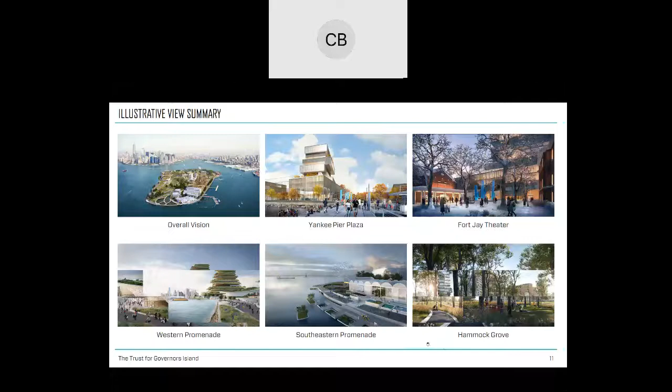This is not going to happen overnight. We are really at the beginning of this journey. Right now we're doing three things in parallel. Obviously we are here before you about the rezoning of the South Island that would enable this vision to come to life. But at the same time, we are working on public strategic planning and public engagement. We'll talk more about that at the very end of the presentation, but really trying to engage folks in what that RFP says and what we're looking for from future users. And then third, outreach and marketing to prospective respondents to ensure that this is a successful proposition.

That will play out, as I said, over the course of the next 7 months, gearing up to a solicitation sometime next calendar year. A brief reminder that we've talked a lot about this in this group.

There's a number of different controls in place for the island. At the top of that sort of pyramid is the deed. When the federal government sold the island to GIPEC, which was jointly controlled by the city and state, the deed provided controls about certain prohibited and permitted uses. And those, no matter what happens with the zoning or the RFP, are in place for certain periods of time.

The zoning, which is what we're here to talk about today, really creates the envelope. It expands upon the allowable uses and sets up restrictions in terms of height, lot coverage, and where development can be located.

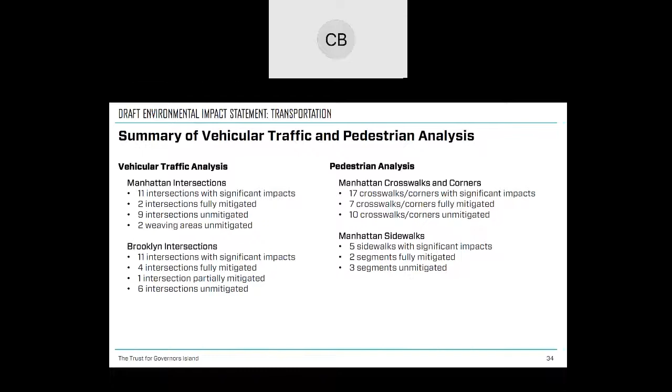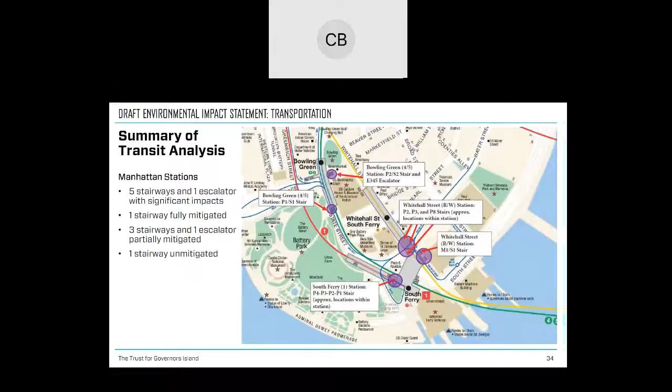Within the subway system, we identified 6 elements that would have a significant impact, 5 stairways and 1 escalator. One of these could be fully mitigated, one of the stairways, and that's really done through reconfiguring the stairway to provide more width for pedestrians going up and down. 3 of the stairways and 1 escalator were partially mitigated, again through reconfiguring, or in the case of the escalator, potentially speeding it up. And 1 stairway was unmitigated, attributed to physical constraints of the subway. All of these have been developed in coordination with New York City Transit.

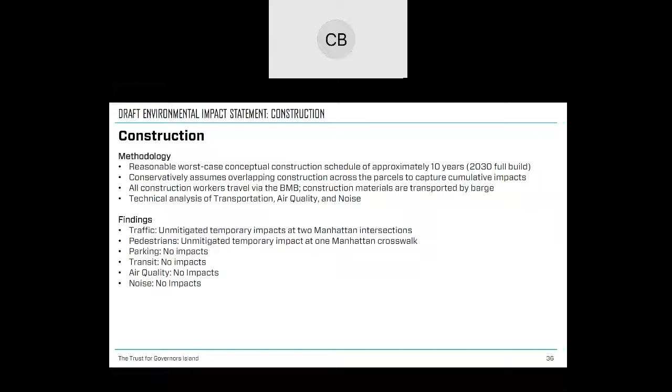In terms of construction, touching back on what Wesley said, we looked at a 10-year build out. When you look at a 10-year build out, you squeeze the construction envelope so that all these sites are kind of being built on at once. So you have this worst case scenario of the amount of traffic coming to the ferry terminals to get to the island. The assumption was, at least for traffic, all construction workers would funnel through the BMB. When we looked at that, there were 2 intersections that were impacted but we could not mitigate. Again, these are temporary impacts, as once construction is done, the impact goes away. Similarly with pedestrians, there was one impact at a crosswalk. We did not notice any parking or transit impacts, or any air quality and noise impacts.

I think, Wesley, I'll turn it back over to you.

Thank you, Mike. So as part of the construction analysis in the DEIS, there was also a study undertaken of potential hazardous materials or air quality impacts. While the EIS did not find that there would be any potential impacts in these areas, the trust did commit to a number of measures that would minimize any potential effects from these sources. As landlord during development, the trust will be able to require that any designated developer implement these measures through its leases and other requirements on the ongoing redevelopment.

So with respect to hazardous materials, the trust has put out a remedial action plan and a construction health and safety plan, which would ensure that there's no potential hazmat impacts.

With respect to air quality, there are a number of measures the trust would be requiring to minimize any pollutants. That includes dust suppression measures, idling restrictions, and the use of ultra-low sulfur diesel fuel. Also, the use of best available technologies during construction would be required.

More generally, the trust is planning for a public engagement process that will continue during construction. They'll have assigned personnel to coordinate with contractors and maintain up-to-date information about development on the trust website. There'll be a process for the trust to receive comments from park users on how they're being affected by construction, if at all. And there'll be flaggers at key access points to ensure the safety of all park users during construction.

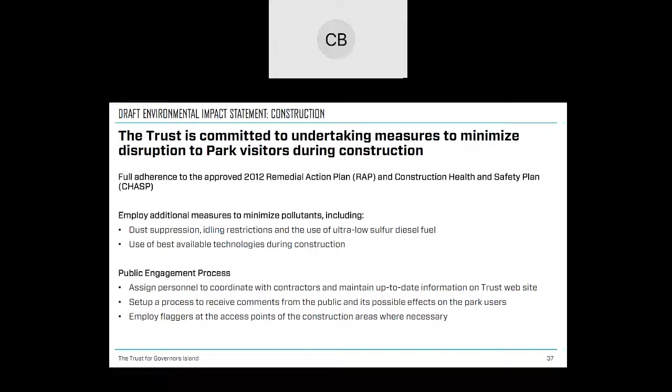Turning now to the shadow study. Although a specific design is not proposed, the shadow study was put together assuming development to the maximum heights permitted at each development parcel. Conservatively, it modeled development with approximately 850,000 square feet more than would be permitted under the rezoning. So essentially, the EIS looks at a building model that assumes almost 20% more development than you could actually have under the rezoning, giving a really conservative outer limit of what the shadows would look like.

The shadow model looks at certain representative dates, such as the summer and winter solstice and the spring and fall equinox. Based on the results, the lead agency, along with various involved agencies, reviewed whether the shadows would significantly impact park users or any plantings. Let's look at the results of the model.

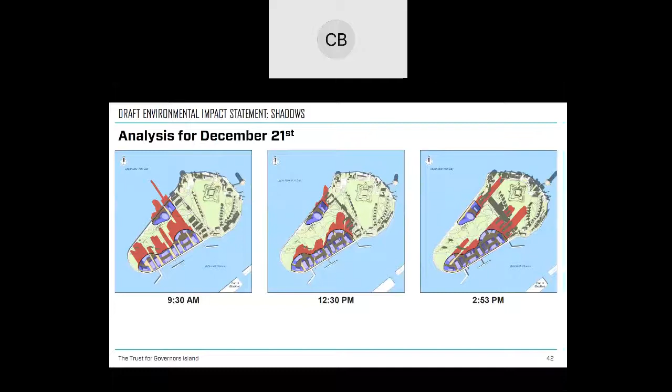As a summary, the EIS disclosed that the rezoning would only result in potentially significant impacts with respect to transportation and construction transportation.

As for next steps, the DEIS is publicly available for everyone to read and comment on. City planning will be having a hearing where public comments will be accepted, anticipated for February 2021, though it has not been scheduled yet. Thereafter, the public comment period will stay open for an additional 10 days for any written comments. After that, the final EIS will be published at least 10 days before the City Planning Commission vote, anticipated in March 2021.

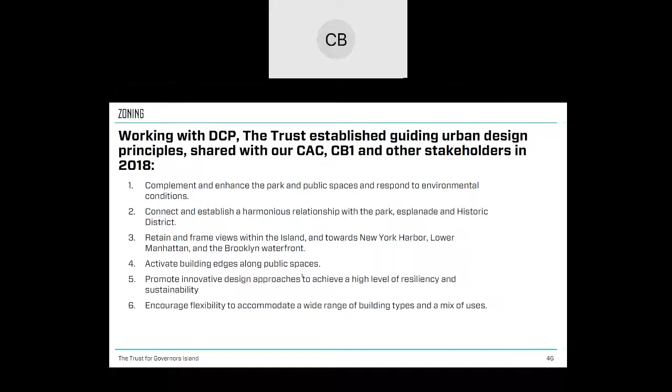We worked over the past couple of years to establish design guidelines to help frame what the rezoning proposal would look like. Since then, we've been working with FX Collaborative to come up with a proposed zoning envelope, and they've taken these design guidelines into all the considerations you're going to see today. They include creating connectivity between the water and the park, creating a harmonious relationship with the park, maintaining important view corridors, and making sure the development parcels complement and continue to enhance us as a public space.

So with that, I'm going to turn it over to Jack Robbins at FX Collaborative to walk us through the zoning framework. Jack? Thank you, Claire.

I know some of you have seen some of these before. Forgive the repetition, but I think this will be helpful for anyone who has not seen it. So just a little quick history. This is what the island started out as, not at all the shape we know it today, when it was a hunting ground for the Lenape Indians.

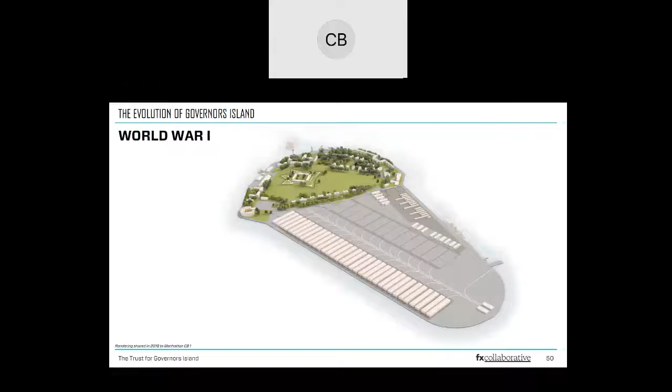It first became a military outpost in the Revolutionary War, and it would remain a military outpost for the next 200-plus years, taking a lot of different shapes over that time. Most notably, the South Island was created with fill from some of the first subway lines dug in New York, brought out here, and during World War I it took on a very industrial character.

When it came under the Coast Guard, the South Island was built out in a very different way, with integration of buildings and open space, and some addition of playing fields. The buildings, I will say, were maybe not of as quality and character as those on the North Island.

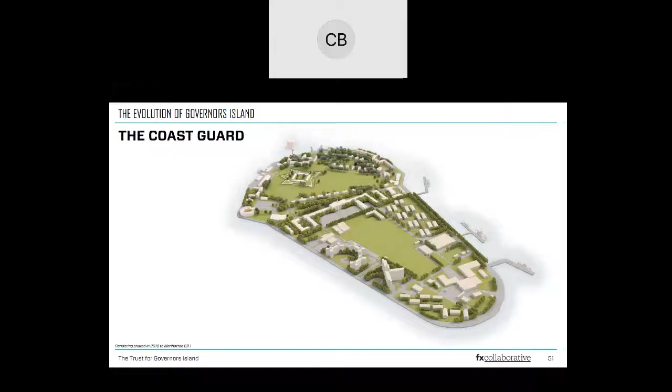And then came the master plan and the creation of the park and the development zones, really creating an incredible destination for New Yorkers and for those from far beyond New York to come to Governor's Island.

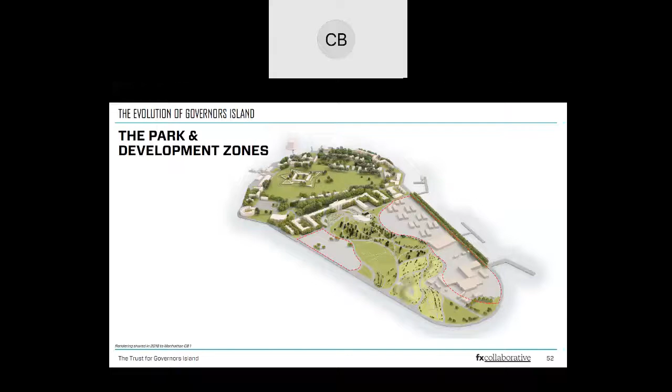And then this fantastic master plan that West 8 did, with this incredible park and these two development zones on either side. From the very beginning, this vision for the South Island was about integrating park and open space with the development zones, presenting this incredible, once-in-a-lifetime opportunity to set a new standard for sustainability and for integrating green space and buildings.

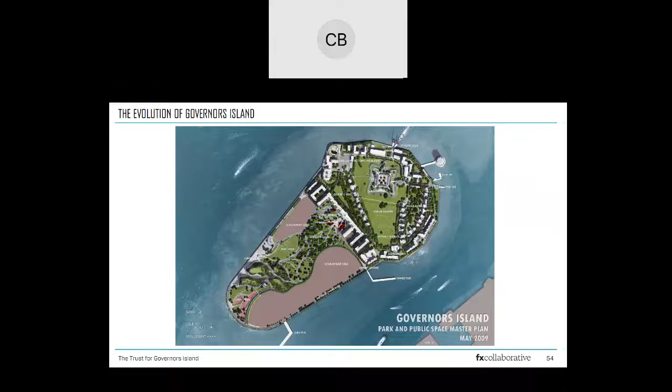Those development zones today are largely fenced off. Some of those buildings we saw in that aerial photograph are still there, have not yet been demolished, but will be. The zones that will become the development zones are not part of the park today. They're not things people are experiencing, places that very few people have actually been, at least in recent years.

So I'm going to walk through some of these urban design principles and what they mean, and then we'll get into how those actually shape the zoning.

One of the absolute key principles was to connect the two major assets of the island: this incredible park and the waterfront, with the incredible views and experience of New York Harbor that waterfront gives you. One of the key ideas was to have those two zones weave through the development zones and bleed into each other, so that it's one continuous experience.

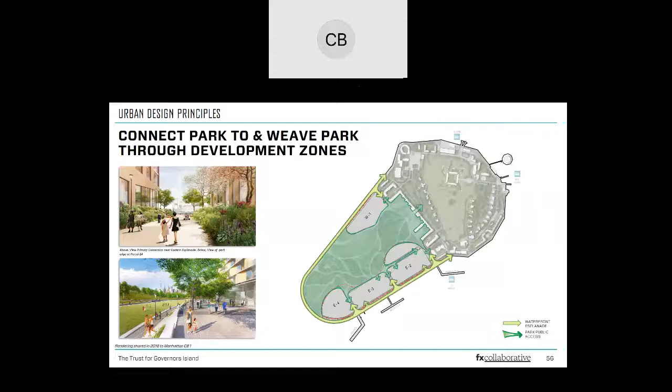One of the models we look to for that kind of integration of open space and development is something I'm sure these community boards are familiar with: Battery Park City. We'll have significantly more open space, not just in numbers but in percentage, than Battery Park City, but I think it provides a good model for how green spaces can coexist and weave through development areas. And I think we can do even better than this, really push that envelope.

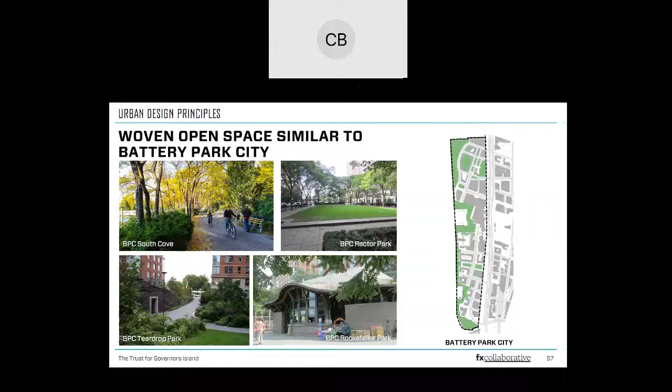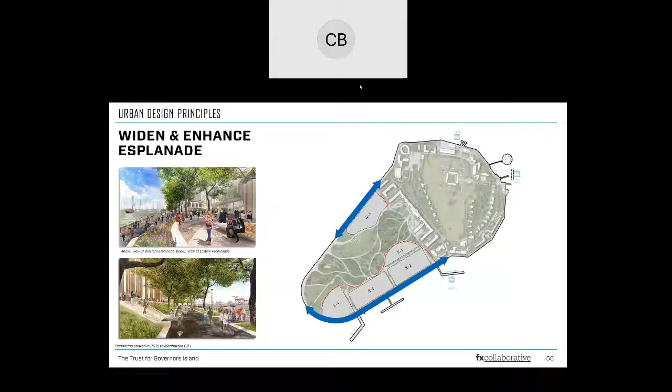Another key element was to enhance one of the great assets that the island has in this waterfront esplanade. So we have widened the esplanades on both sides of the island, both to create generous public spaces, and also to allow space for dealing with resiliency issues. Buildings, or maybe even grade level, are going to need to be elevated to deal with flood elevations, and we want to make for smooth transitions within that zone, not create walls along the waterfront, but allow those to be nice, gentle transitions.

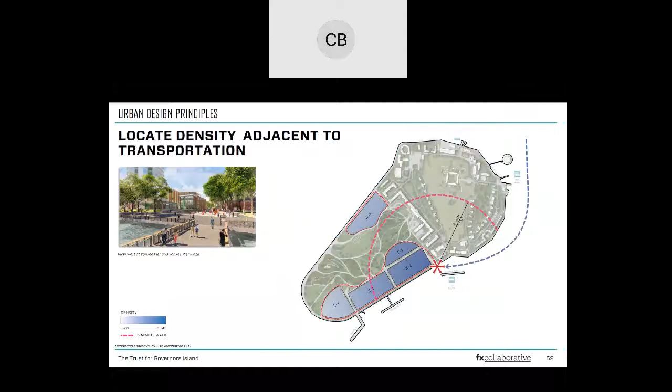Yankee Pier is going to be the gateway for this area of the South Island, and it serves a lot of the North Island as well. It's really the most viable entry point, and as just basic good urban design principle, transit-oriented development, we put the higher density close to the transportation. It's easy to forget sometimes how big this island is, and that it can actually take quite a while to walk from one side to the other. So to help encourage people to come here, we want to make sure that the development is easily accessible from the transportation and vice versa.

And then we want to be very sensitive to the transition between the North Island and the South Island. There used to be Division Road. It's still there in a legal sense, although it's no longer this sharp straight line that cuts off the South Island from the North Island. The West 8 Master Plan introduced these curving paths, brought them into the courtyards of Liggett Hall, and we have built upon this series of courtyard spaces in this zone that divides the North Island and South Island, as that integration between building and open space.

So we've created Yankee Pier Plaza. There's also a set of special controls along this transition between the North Island and South Island for any development on the South Island. It helps to make a nice transition in terms of height and really sensitive to the context to the north.

You can see in the rendering on the left, King Road, which is right here—I don't know if you can see my pointer—connects one of the roads that will connect the North Island to the South Island, and it's really an extension of the fabric of the North Island.

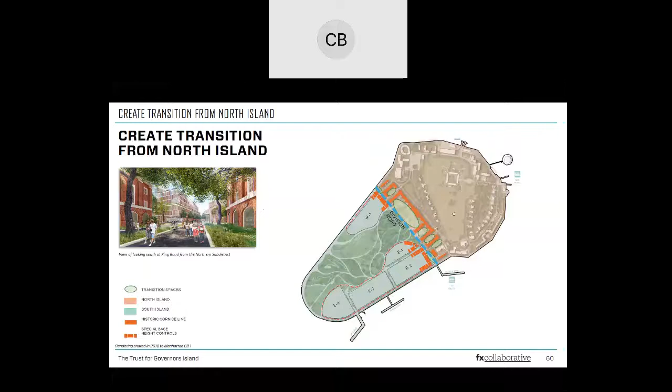And then a whole series of different kinds of nodes and paths. So some of those nodes are fairly obvious in terms of the arrival point at Yankee Pier Plaza; the oval, because of its special perfect geometry in the midst of all of these other waving curves of the park, really creates this special place. We want to be sure and connect both of those places to other areas in the North Island and to each other, or even places where there's a kind of coming together of different paths. So if you look along the edge of the west parcel where a bunch of different paths come together, that also creates a node. We want to be sure to acknowledge that in the design.

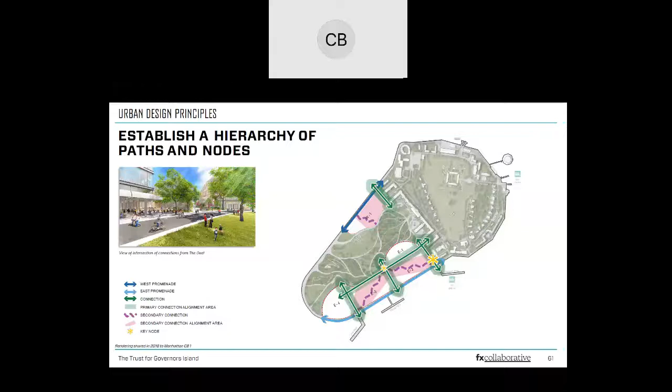So we've created a flexible envelope, and it is just an envelope. We have not designed buildings. We have tested these zoning regulations with lots of different building forms and configurations. We feel that we have created a set of zoning controls that will enable development and enable a kind of flexibility, but at the same time really preserve all of those fantastic, unique qualities that Governors Island has today.

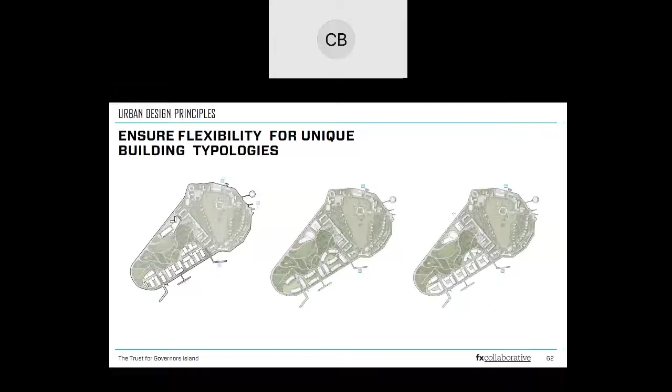Next. So I'm going to turn it over to Ben Abelman.

Thanks, Jack. So I'm here to walk through and translate how the zoning framework and the concepts embedded in it translated to the actual text.

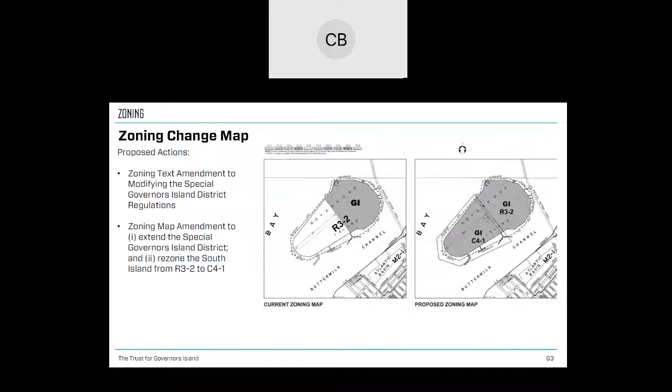So the first item to discuss is the land use actions that we are applying for this rezoning, and those are two. The first being a zoning map change, which is intended to draw the Governors Island special district to not only cover the North Island, but for it to cover the entire island. And then it will change the Southern Island zoning from an R3-2 single family residential zoning district to a C4-1 district, which is a medium density mixed use district. It's important to note that the North Island zoning is unchanged in the zoning proposal.

Next. So once we've established the new zoning overlay of the new zoning districts, we are subdividing the island into two different sub-districts, and then on the southern side, dividing that sub-district into three sub-areas. The three sub-areas of the southern sub-district consist of the eastern development sub-area and the western development sub-area, and these are the only locations where new development can exist. And then the open space area is established to ensure that the open space and park that is there today remains publicly accessible and open as open space. Next.

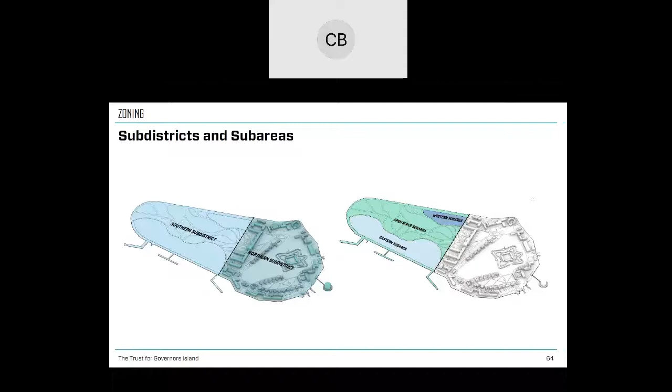Next, please. So now I'm going to walk through the series of ground plane controls. So the slide you see...

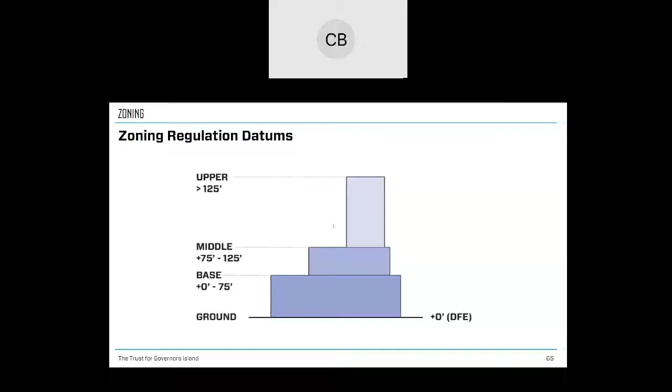So the ground plane controls are established to create the development parcels within the development zones. On the eastern development sub-area, there will be 4 development parcels, whereas the western sub-area will be 1 development parcel. Those parcels are created by additional open space, which are primary connections. The intention of the primary connections is not to be mapped specifically as shown in the green arrows, but to allow those green arrows to be anywhere within that green hatched area. That provides flexibility to tailor the parcels to the program within the RFP.

In addition to the primary connections, there is a requirement for public open space, which in the zoning will be called Yankee Pier Plaza, a minimum 25,000 square foot gateway at the foot of Yankee Pier, acting as an entry to the island. It's also important to note that the esplanades are widened from their current conditions, 55 feet on the east, widened to 75 feet on the west.

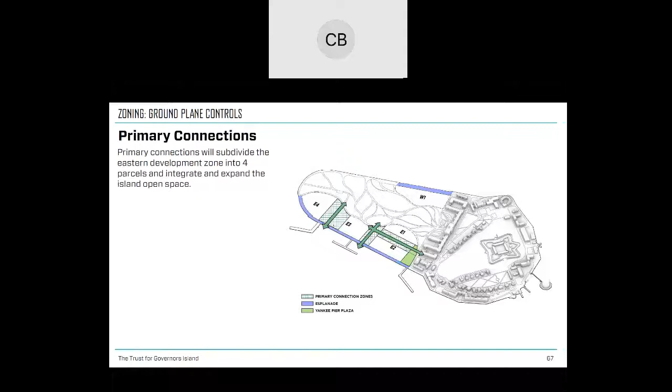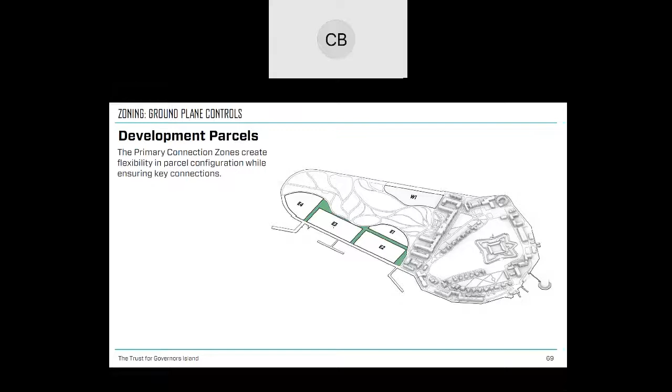As you can see on this slide and the following slide, these are just 2 examples of the flexible framework or flexible zoning tools in how these parcels can be crafted. Within that green hatched area, we could have curved, swaying lines mimicking the geometries found in the park, or, in the next slide, a more rectilinear parcel organization. I'm going to use this rectilinear parcel organization as the base case to walk you through the rules.

In addition to the primary connections, Yankee Pier Plaza, and the widened esplanades, there will be open space within the development parcels themselves. That's shown here with the green hatch again, with the green arrows. These are flexible zones where secondary connections can be located or required to be located within the parcels indicated. These secondary connections could be open to the sky, but they can also be enclosed, passing through buildings.

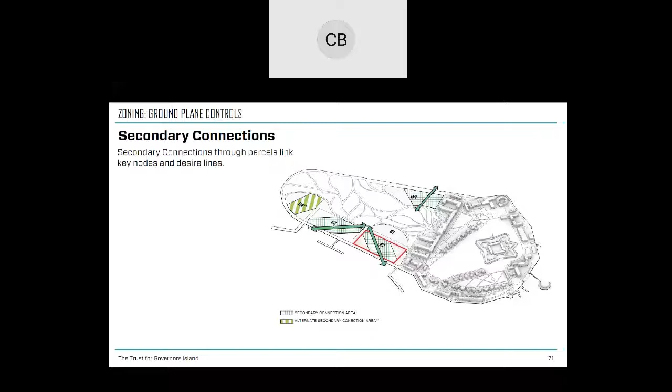Next, we're going to zoom into parcel E2 and take a look at how all of this is coming together. In addition to the secondary connections, the primary open space, primary connections, and Yankee Pier Plaza, there are other regulations that will create more public open space. One of those rules is a regulation that requires any building portion that is set back from a parcel boundary—that space between a public access area, the esplanade, primary connections, or the park, Yankee Pier Plaza as well—must become open space.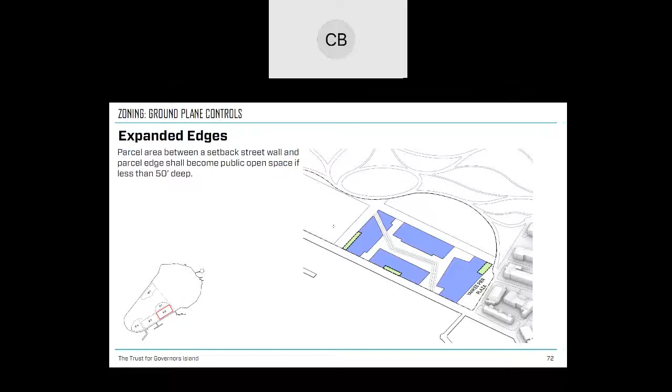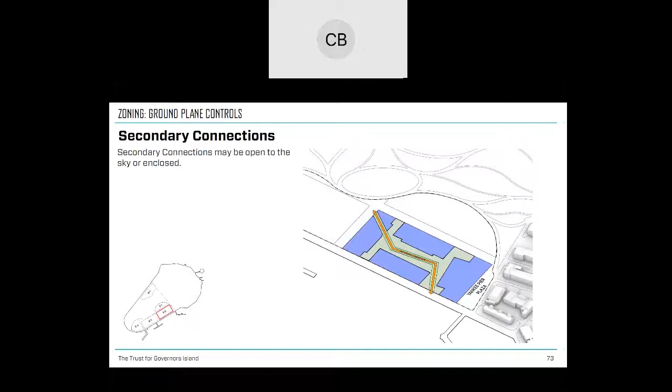These areas highlighted with neon green are building footprints which are set back from that parcel edge, and that neon green would then have to become part of the public open space of the development zone. Next, here we're seeing the secondary connection taking its diagonal path around the building footprints within this illustrative footprint on parcel E2, where it would enter from the esplanade and exit towards the oval. We're showing the secondary connection passing through a building at that northwest corner.

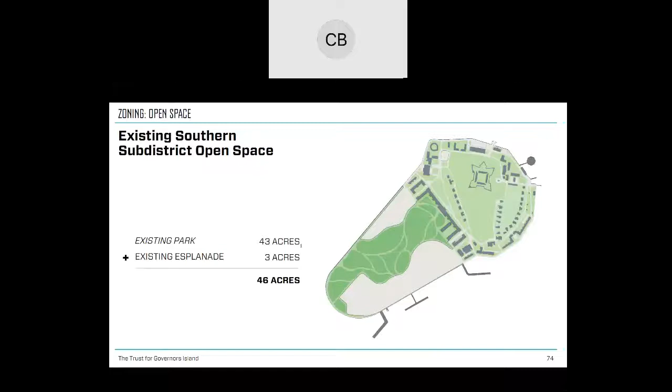So it's important to tally up all of these additions of open space. Right now, the park is 43 acres. If we add on the existing esplanades, it gets us up to 46 acres. Next slide.

With all of these additions to the expanded park, certain areas adjacent to Picnic Point, currently fenced off, will be turned over to the park and added into the open space. The widened esplanades will add over an acre, Yankee Pier Plaza will be just over half an acre, and the primary connections themselves will account for approximately 4 acres. So within the development zones, there'll be about just over 8.5 acres of additional public open space.

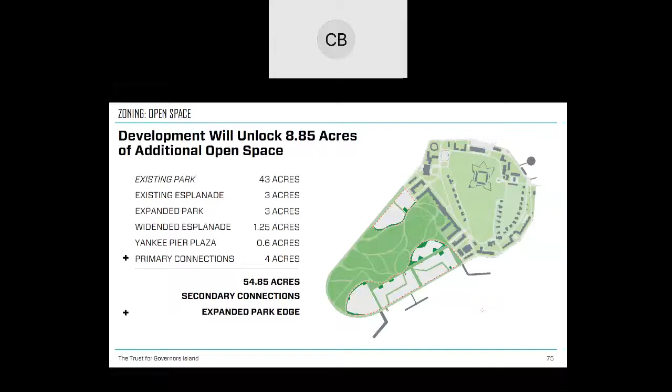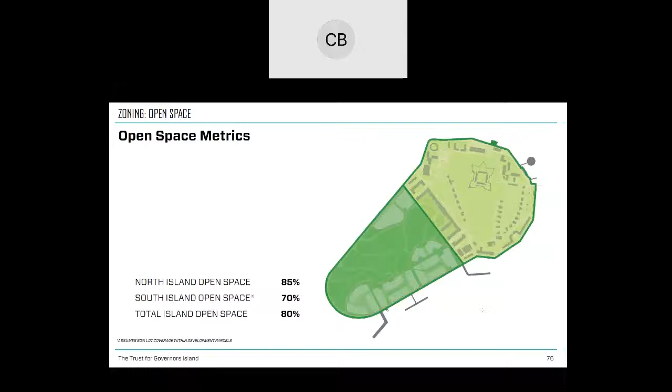Looking at the percentages of open space on the North Island—the total lot area subtracted by the building footprints—about 85% of the North Island is publicly accessible open space. Within the South Island, we'd have 70% open space, assuming the most aggressive amount of lot coverage, so it could be closer to 85%. In total, the island will be 80% open space and 20% building.

Now let's go above the ground plane and talk about the bulk regulations, which are divided into three datums: base, middle, and upper. The base portion of the building is predominantly established between the design flood elevation and 75 feet above it. There are a couple of exceptions to the maximum base heights: for buildings fronting solely onto the esplanades, the maximum base height is 60 feet, and adjacent to transportation at Yankee Pier Plaza, we're permitting a higher base height of 90 feet. In addition to height controls, building size is controlled by lot coverage, permitting up to 80% lot coverage to allow large, low floor plate buildings.

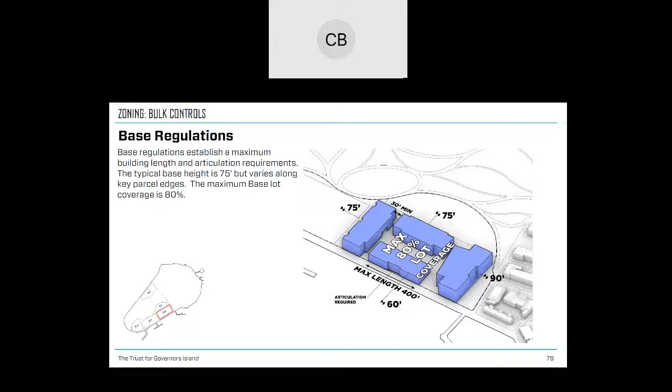We're establishing a regulation that limits building length to no more than 400 feet, to ensure porosity through the development parcels. In addition to the maximum building length, there are articulation requirements so we don't have a long blank street wall, and we require a minimum 30-foot distance between buildings, again to ensure porosity.

The mid regulations apply between 75 and 125 feet. The lot coverage turns down here, going from 80% at the base to 50% at the middle, while the minimum distance turns up. So as we move up, the footprints get smaller and the space between buildings gets larger—it's a 60-foot minimum distance at the middle section.

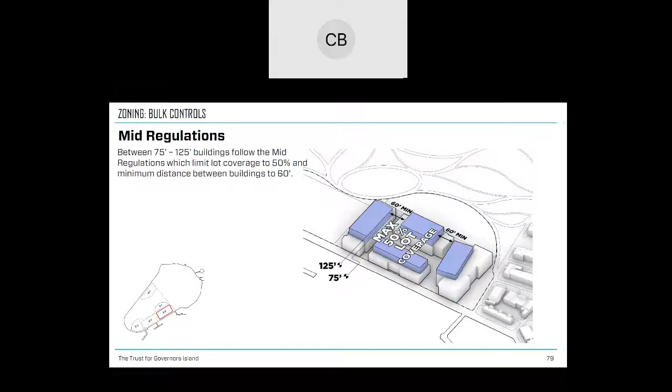The upper building portions are controlled by lot coverage, which is 30%, further reducing the size of building footprints above the middle section. In addition, each individual upper portion floor plate cannot exceed 30,000 square feet, so we can only have 30,000 square foot increments above 125 feet. The minimum distance between buildings expands to 90 feet, and there are maximum building height controls, which, as you'll see next, can be exceeded by permitted obstructions.

Maximum building heights vary by parcel. W1 and E2 both have a maximum building height of 300 feet. Parcel E1, just to the west of parcel E2, is 230 feet. The remainder, E3 and E4, have a maximum building height of 200 feet.

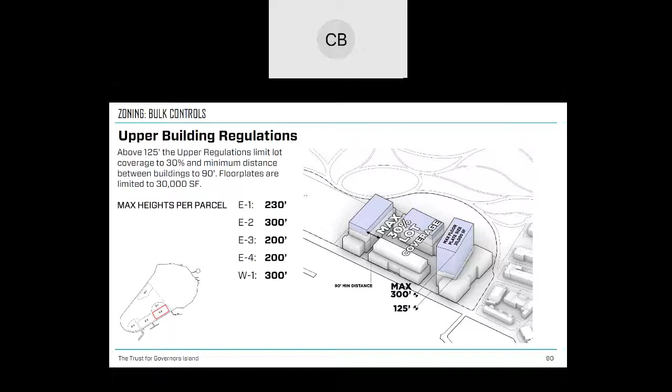In addition to the size and lot coverage of upper building portions, there are controls to ensure we're not creating a wall above the base parallel to the waterfront on the eastern development zone. We have rules promoting the narrow face of the building being closest to the water, but with optionality to allow a building running more north-south if it's pushed far away from the water.

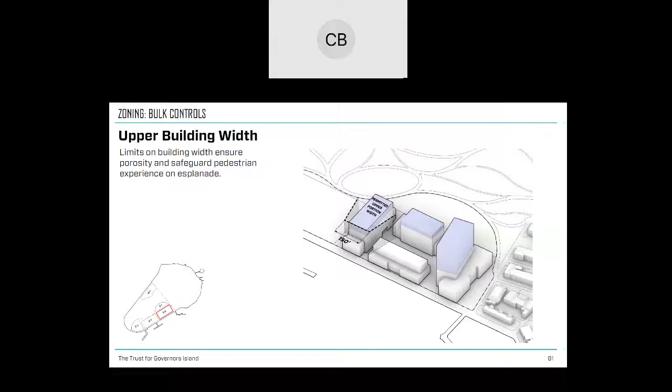Maximum building heights can be exceeded by permitted obstructions, typically elevator and stair overruns and mechanical bulkheads. Because of the location in the middle of the harbor, and for resiliency purposes, we believe an oversized allowance is needed, providing ample room on top of buildings for all important mechanical systems. So we can exceed the maximum building height by 40 feet with the size of the footprint below, and by an additional 20 feet, though that footprint must be no greater than 50% of the footprint below.

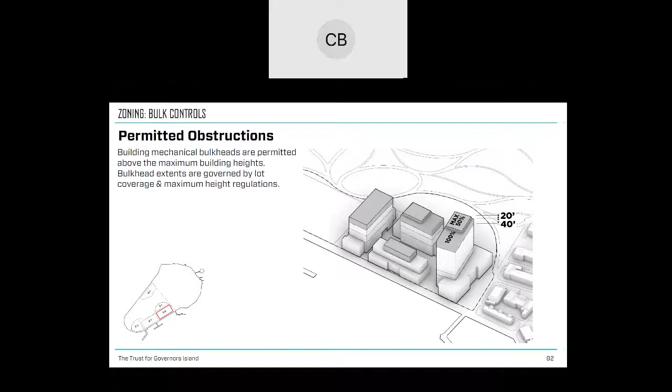So those are the controls that are consistent throughout both development sub-areas, but there are some special controls which I wanted to point out.

One of those is activating the ground floor, and one of the ways zoning typically does this is through transparency requirements. Adjacent to secondary connections where they pass into buildings, there will be transparency requirements to highlight and indicate the uses and invite people into these spaces. In addition, there are transparency requirements adjacent to Yankee Pier Plaza, which we see as that gateway to the island and to the new development.

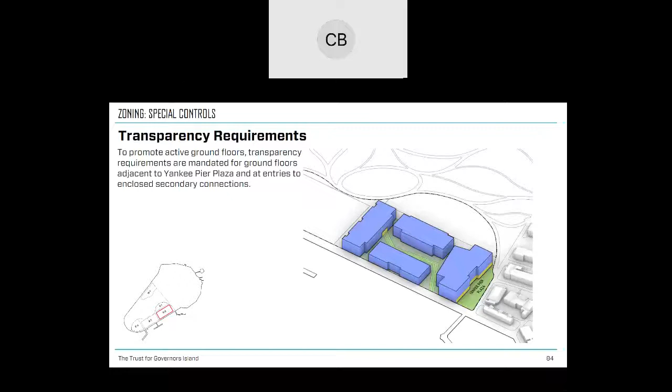In addition to the regulations about tower orientation within the upper zones, there is one very specific regulation which applies to the first building adjacent to Yankee Pier Plaza. If an upper portion is within that first 200 feet within Yankee Pier Plaza, it cannot be perpendicular to the waterfront.

The reason here is that Division Road, which we see as this straight line cutting across the island, is coming in at an acute angle from the waterfront. So we do not want to pinch the space at Yankee Pier Plaza, and we want to ensure an open corridor to permit light and air, and that entry point into the park.

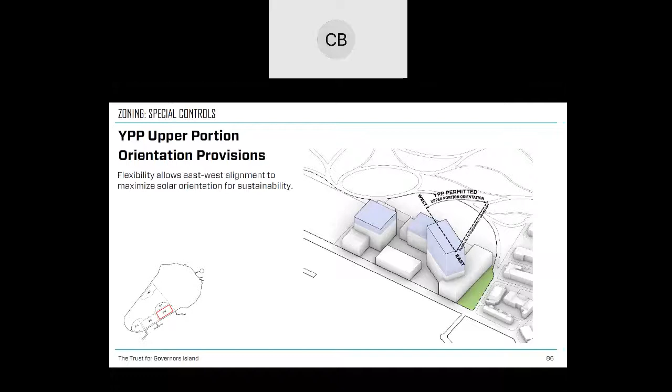So for this tower, we're not prescribing a specific orientation. It can be oriented anywhere from parallel to Division Road, or oriented to optimize solar gain and passive heating and cooling. We can orient the building true east-west.

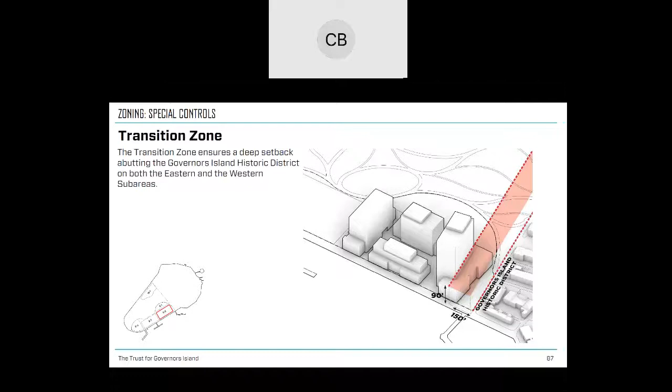Setbacks established from the primary connections and from the park are typically 15 feet. But there are a few special conditions where we have deeper setbacks, one of which is the transition zone, measured from the Division Road sub-district boundary line, offset to the south by 150 feet. That 150 feet from Division Road cannot have anything above a base. This ensures a deep setback not only in parcel E2, but in parcel E1 from the northern sub-district, and it also pushes any upper building portion on the western development parcel further south.

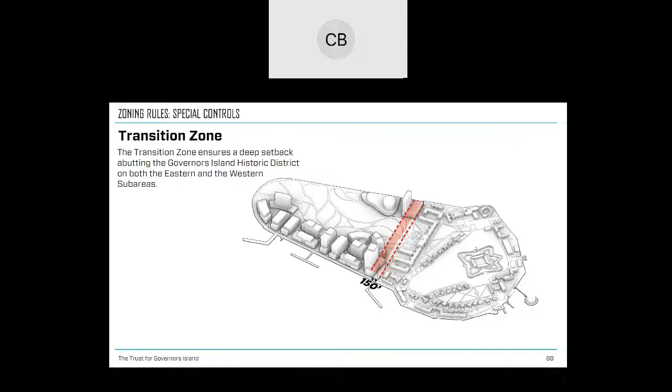Now looking at parcel W1, which is unique because it is the development sub area and a parcel all in itself, it will have the secondary connection requirement, which you see bifurcating the site in this massing. But there are specific base height regulations here.

The main base height regulation limits the maximum base height at the southern end of the Western Development Zone to 50 feet in that first 100 feet from the south. That's really to step down towards a future park amenity and the views out to Statue of Liberty, and also to step down towards Outlook Hill.

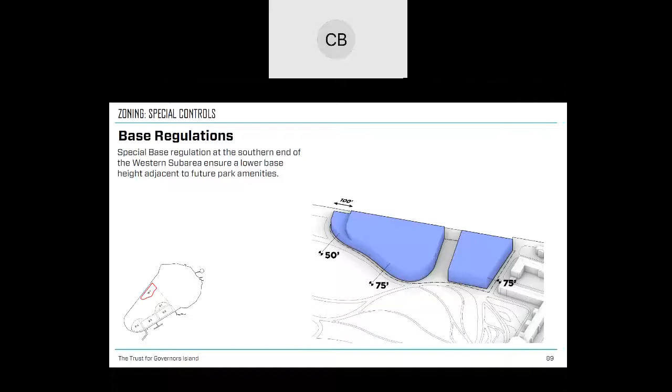In addition to the special base height controls on parcel W1, we have limitations as to where upper building portions can be located. The areas shown in gray and red are areas where we cannot have any upper building portion. This is the first 100 feet from the south of the Western Development Zone, and the first 100 feet from the Western Esplanade, so a setback of 100 feet would be the minimum. We also have the transition zone of 150 feet, which creates a more limited area where we can have upper building portions. This is crafted to ensure good views towards Lower Manhattan from Outlook Hill.

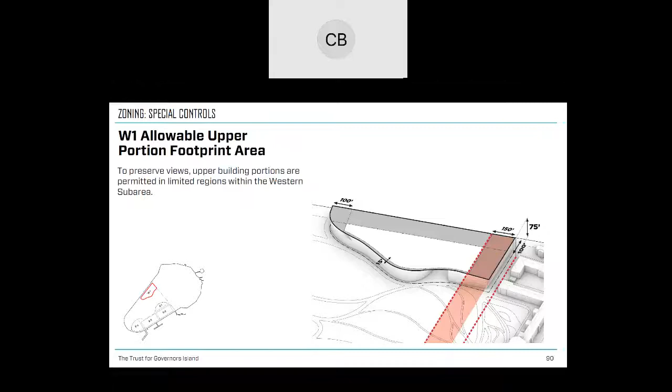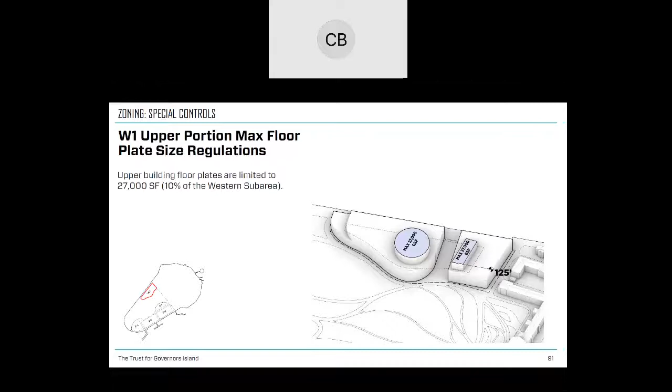In addition to the lot coverage regulations of 30% for the upper building portions, maximum floor plate sizes in the upper zone within the Western Development sub area is capped at 27,000 square feet, or 10% of the total area of the Western Development Zone.

Here we see the test case we've just walked through applied to all of the different parcels. You see, passing through the ghosted buildings, secondary connections, the woven open space, a variety of building heights adaptable to the eventual programs, and a network of new open space that connects visitors from the development zones to the park, and from the park to the development zones.

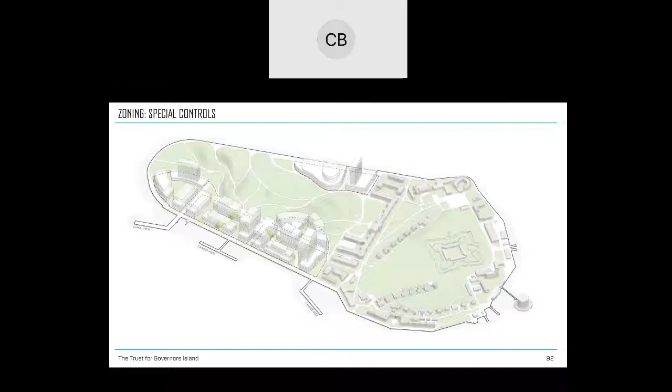So I'm going to turn it back over to Jack to discuss some view studies. We've had a number of questions from members of the community board and the public, and we want to address some of those questions directly. One of those questions has been about the views and what the impact on the views would be. I'll show you a series of view studies and renderings to try to answer that question.

There was a question about the view from Outlook Hill. This is showing the development on the Western Development Zone and the view from Outlook Hill. You can see the controls that Ben was just talking about, keeping the part closest to Outlook Hill low so it doesn't block views of the Manhattan skyline. We don't know exactly what the buildings will look like - they haven't been designed. These are just massing studies, but the tower you see there does represent the maximum height allowed in this development zone.

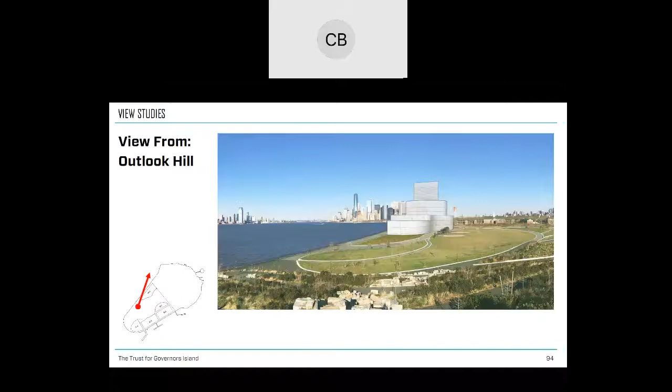Next, Liggett Terrace - as you come through that great arch and enter this wonderful realm of the park, what do you see, and what's that experience going to be like? This shows the Eastern Development Zone on the left and the Western Development Zone on the right. It's important with all of these views to keep in mind that this is an ever-changing environment - the trees will grow in, and the dashed line represents the full height of the tree canopy when it grows in. We've seen other renderings showing some of that, and so the development will be largely not visible because of the natural growth of the trees.

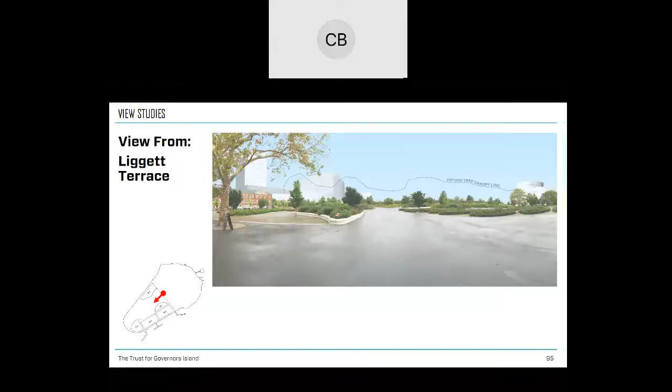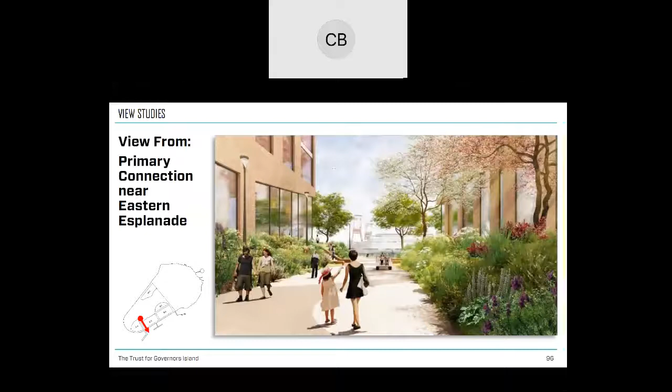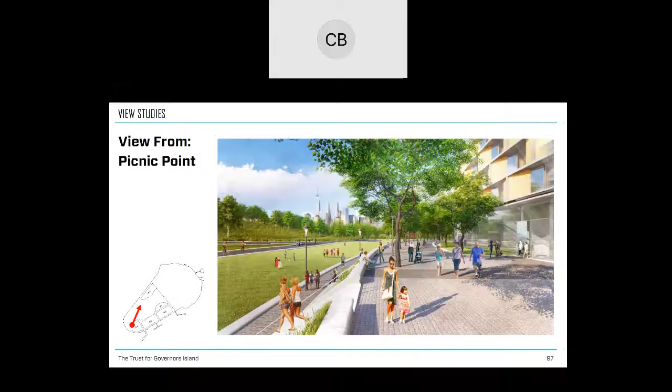Or all the way down at Picnic Point, when you look back towards the Manhattan skyline, you really won't see any of the development on the western side. The beginnings of the hills really obscure that. You'll be adjacent to the lowest scale development just on the right of the image here. But it gives you a sense of how we're trying to integrate the buildings and the open space. Really, it's a symbiotic relationship - the buildings will help activate the open space and help provide amenities as well.

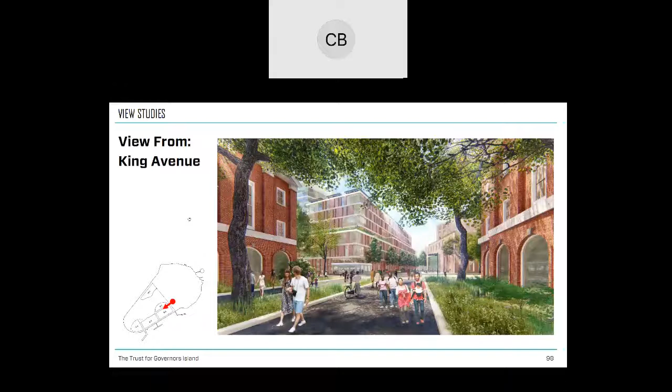Next. This is the same view I had pointed out earlier along King Avenue, looking over the North Island, the historic buildings you see immediately on the left and right, and the extension of King Avenue that becomes one of these primary connections heading towards the Oval, leading people through the development and into the park beyond.

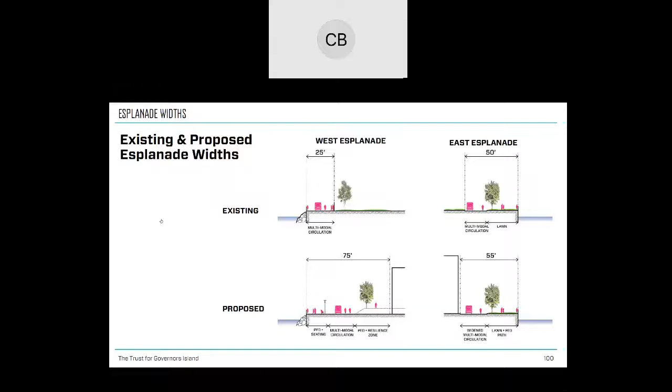Another question we got was about the esplanades and the expansion we've done with them and how we arrived at that number. So you see here on the top row the section, the profile of the existing esplanades on the west and east side of the island, and below that, what the proposal is. The western esplanade really gets tripled in size because it's too small now. As I mentioned before, it's very generous public space, also allows for potential grade transitions or other resiliency strategies. You can see in this section a suggestion of a set of steps and ramps that would go up to an upper esplanade. That's one approach to resiliency, but we're leaving it open because resiliency is a quickly changing area of design. And then on the East Esplanade, which is already fairly generous, just a slight expansion to that.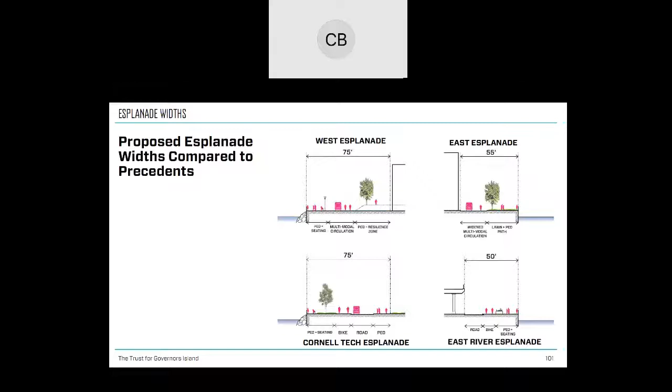Just some images for anyone not familiar with those, to refresh people's memories of what that spatial experience is like in those areas. East River Esplanade, like the Eastern Esplanade on Governor's Island, is a slightly more urban environment where there's more development next to it, like Cornell Tech on the western side. It's important - more isn't necessarily better. An esplanade can get too big and feel unwelcoming and kind of desolate. So a couple of examples, again, in both the more urban environment and a slightly less urban environment, of what that might feel like and what we're trying to avoid in sizing this. It is a bit of an art form and not an exact science, but based on these precedents, we think we're at the right number.

A similar kind of question about Yankee Pier Plaza and what that space is like. Next.

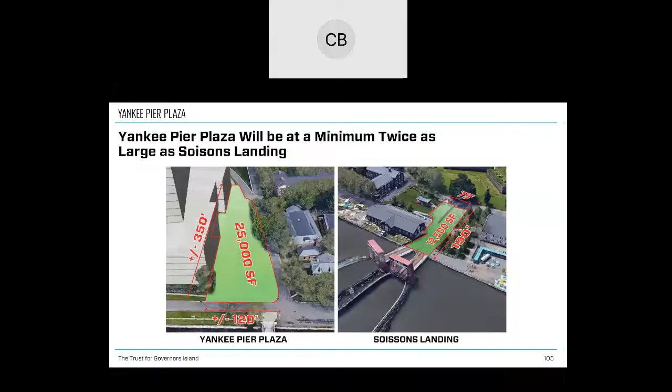Just as a comparison, Yankee Pier Plaza will be twice the size that Soissons Landing is today. We also envision that as a landscape space, a space you'd actually want to hang out in, that can act as a gateway, as well as a place where lots of ferry riders will transition, arriving to and from the island.

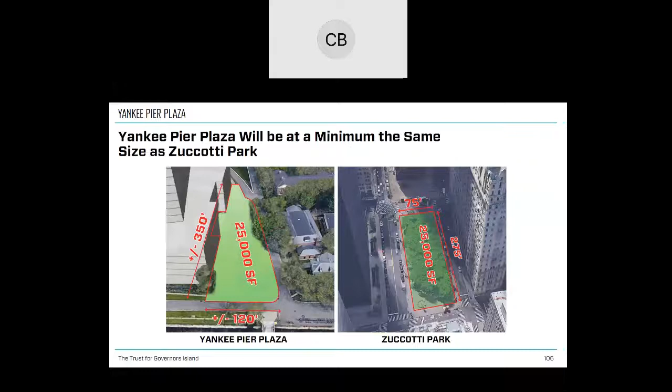To give CB1 a reference point you'll be familiar with, the area we've set aside for Yankee Pier Plaza is pretty much the same area as Zuccotti Park, providing a wonderful gathering space, a bit of green space in Lower Manhattan. So the overall area is very similar to Zuccotti Park.

So here on screen, I don't know, Claire, if you want to take this, a series of some of the other questions that we've heard.

Yes, thanks, Jack. A few other questions have come up in the past couple of sessions that we wanted to make sure to address so you wouldn't have to ask them again. Will development take park away? No. The rezoning creates that open space sub area, and expands the amount of open space, but none of the open space that is there today would be impacted or taken away.

Some folks have asked whether there could be a casino when the deed restrictions expire. No, casinos are not allowed under the proposed rezoning, in addition to not being allowed under the deed.

Somebody asked about infill development. This has come up a lot for this board in light of some of the conversation around East River. Infill is not being proposed. It would also require its own whole slew of approvals, including another ULURP.

How many buildings at the maximum height could be built? The way the zoning works, which Ben walked through today, is that each parcel has a bunch of rules for the area above 125 feet, which include lot coverage and capping of floor plate sizes, and finally minimum distance between buildings.

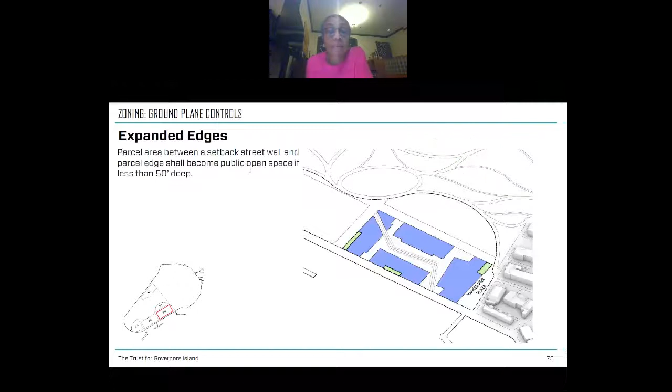And again, thank you for listening to this. We wanted to make sure to answer all the questions, put all the information forward so the community board and the public have full transparency and are able to comment and ask questions through the course of the evening.

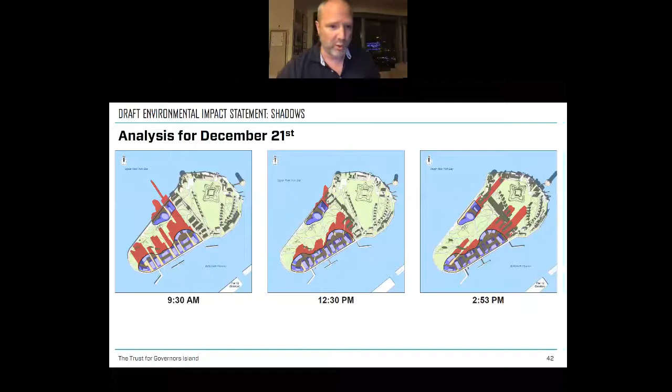Thanks, Fern. Just a couple of questions and a comment, and then I'll shut up after that. But thanks again for being here, this has been really informative. My first question, this might relate to something I asked a couple of months back about residential buildings. You're saying now the whole island was a concern for residential, but I don't remember that being the concern. I remember the concern being any residential development on the island, as opposed to—and I'm quoting you—hotel and dormitories only. Maybe I missed a meeting, but where did the change come from, from no residential to only some residential? My second question is, are you counting walkways, pathways, and roads as open space as opposed to green space, which is a concern of mine?

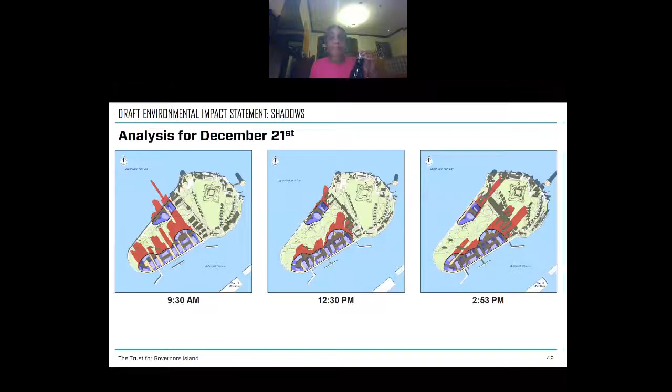And my comment, I'll leave you to answer all these: as someone who's been dedicated to climate change and renewables for 15 years now, I feel like the development of this island would far offset any efforts you have for a climate institute or classrooms for climate. The resiliency alone would cause tremendous problems for the island. And construction—the gasoline, the fuel used—all of it contributes greatly to the climate crisis. So I'm very curious how you'd offset that.

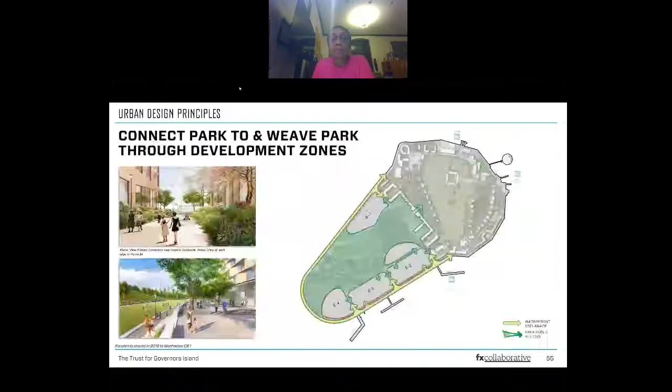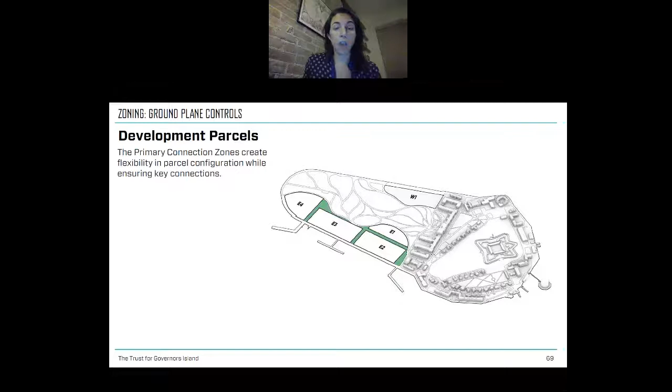Sure, Colin, I'm going to try to respond to the residential question, but please jump in if I don't get it right. Nothing has changed about what we were talking about previously. It remains the case that no permanent residential is allowed anywhere on the island. However, there was concern about whether there was a loophole because of the 3 FAR, up to 0.5 of it could be residential zoning. That would allow for things like faculty housing, but it would not allow for condos or standard leased apartments or something like this. So we just wanted to make sure tonight to answer the question that came up. I don't remember how many meetings ago, but folks were like, oh gosh, when the deed restriction burns off in 2062—

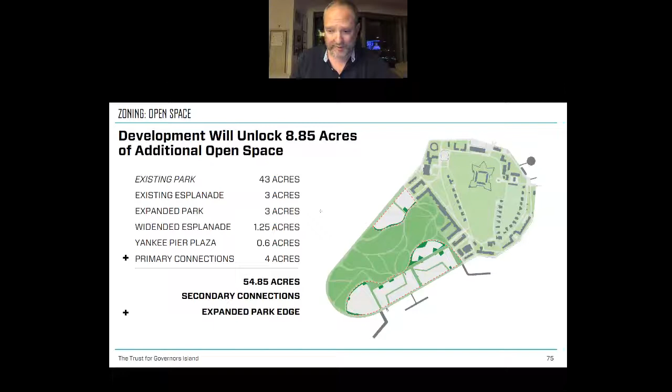It does. It seems a bit contradictory to the presentation we just saw, but I'm happy to take that answer for now, though I'll certainly be dogged on it in the future. Would love to hear the answer to the second question about how you're actually defining open space versus green space. Yeah, was getting to that, just wanted to make sure I checked the box on number 1. On number 2, yes, paths are counted as open space. We count them that way for the North Island as well as the South Island, just like the Esplanade itself. It may have some portions that are grassy and some that are permeable pavers or paved, but we count that as open space as well. We're not calling it park, obviously, but non-building footprinted areas.

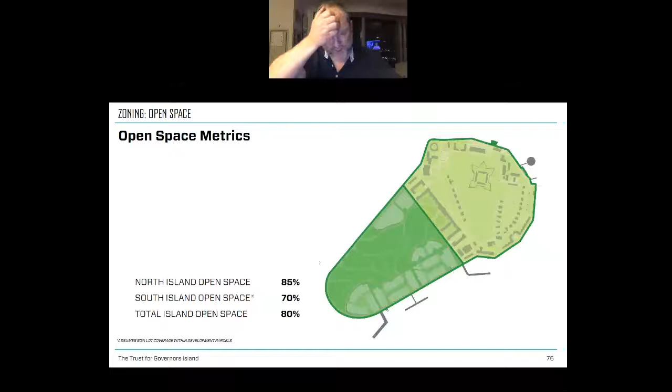Yep. And finally, I'm sure someone smarter than I am, maybe at Columbia's Earth Institute, could do some sort of study on the economic and climate impact of this project. How on earth are you going to offset it? I saw someone ask questions about solar and wind power. First of all, there is no wind regime on the island to even support a public bathroom, never mind a set of buildings. Second, this is what I do—if you were to power the island with solar, you'd have to cover the island in solar panels. So obviously you're going to need to draw power from somewhere. How are you going to offset not just that, but also the climate impact of the actual construction, which I'm assuming would take years?

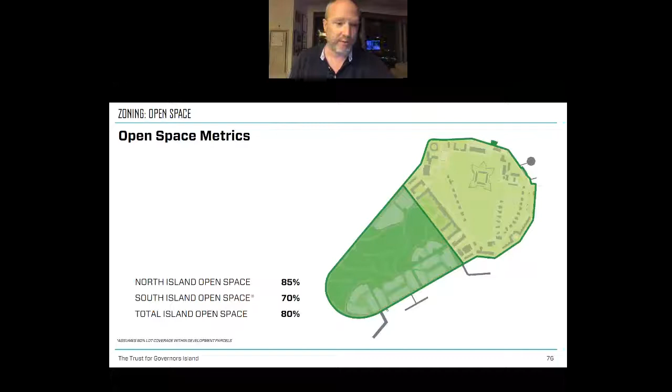That is part of the process that we're working on through those design guidelines for the RFP. It's something we're working on at the Trust for now. You're absolutely right about the wind power.

There's a slide in the appendix which we could pull up if helpful, but it's about both generating as much sustainable, renewable power as possible for the development, and also about bringing down the energy consumption of those buildings. We have some proposals around that as well. But I think the real thrust of what we're going to have to do is through the RFP process, describe to potential partners exactly what we're expecting in terms of performance criteria, because we're not going to be the ones designing the buildings, but they can respond to that in terms of their proposed development plan.

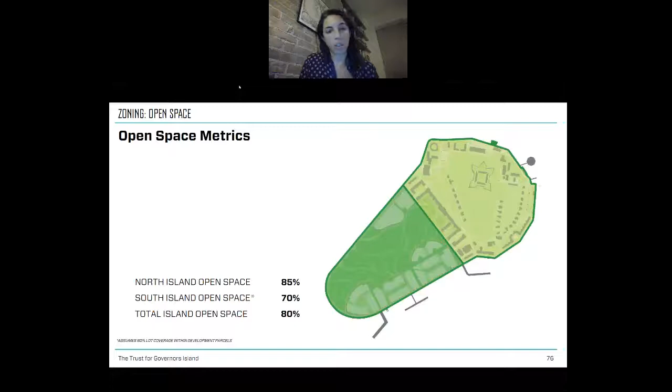It may be possible also to harness some geothermal power or other things, but I agree that wind's not going to get it done. One thought, and I'll let you go, but peaker power is a big thing, as is utility scale storage. I would urge you to look into that as well.

I have lots more questions, but I see Alice's hand raised, and I'd really like to hear from her. So Alice is up next, and then Rosa, Vicky, Susan, and possibly Andrew.

Awfully kind of you, Colin. I just wanted to say I thought that was an extraordinary presentation. I can't thank you enough, really tremendously helpful on a lot of levels. Obviously, we all have a million questions. I guess this is the beginning.

I'm just curious, under the financial information presentation by Christopher: in 2010, I guess the city spent, I think, $350 million on water and electricity infrastructure after the state left the funding to the city. What do you assume the city will take on at this point, if anything? That's one question.

Yeah, I think I'll just do it in chapters. I'll start and then Chris, you should jump in. The reality is that the $15 million number we get from the city on an operating basis has held constant for years now, and it's the same number in the 4-year operating budget plan. So if anything, what we face year in and year out are cuts, AKA pegs. We haven't seen any increase in operating budget from the city because it has long been the goal to see the island create this path to financial self-sufficiency.